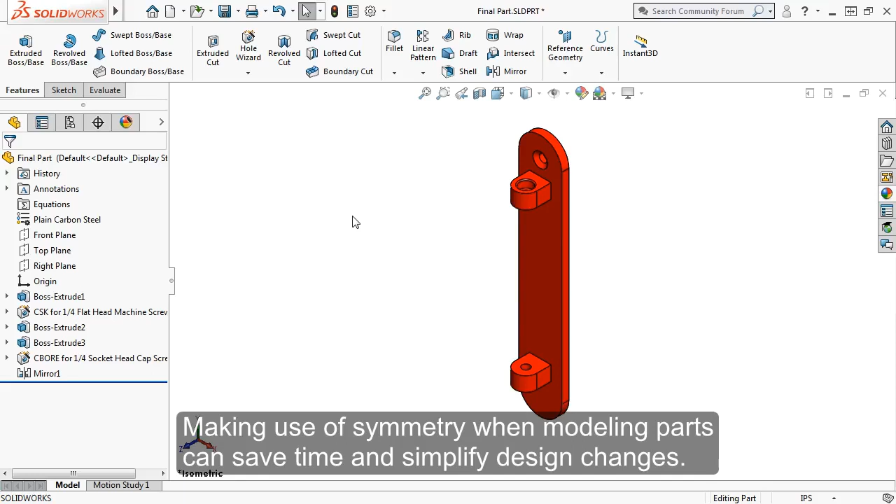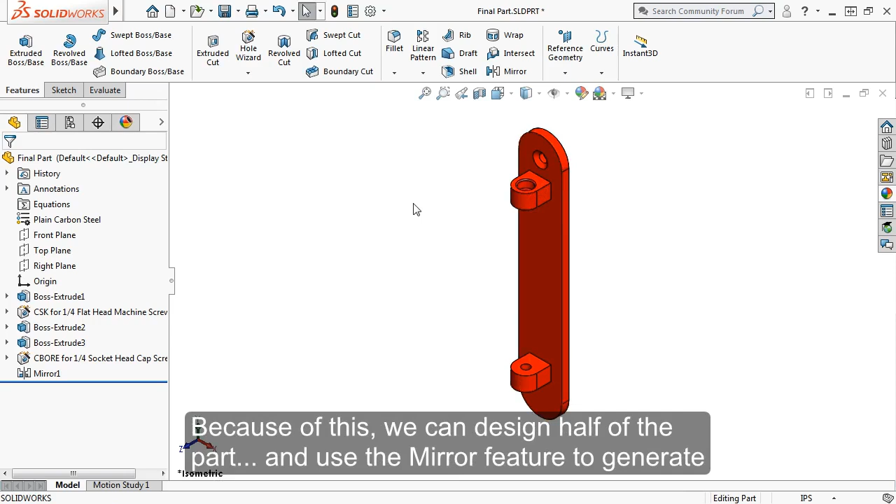Making use of symmetry when modeling parts can save time and simplify design changes. This part, for example, has symmetry across the top plane, meaning it is exactly the same on the upper half as it is on the lower half. You can see that it has the exact same features: the rounded base, extruded boss, and two holes on either side. Because of this, we can design half of the part and use the mirror feature to generate the other side.

First, I'll create a new part file. Make sure the units are set to inch, pound, second, and set the material to plain carbon steel. I'll start by creating the sketch of the first base extrude on the front plane.

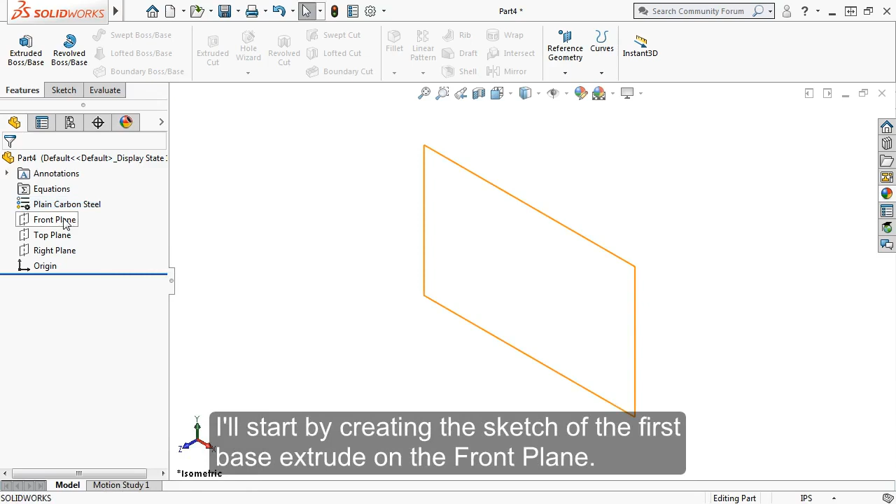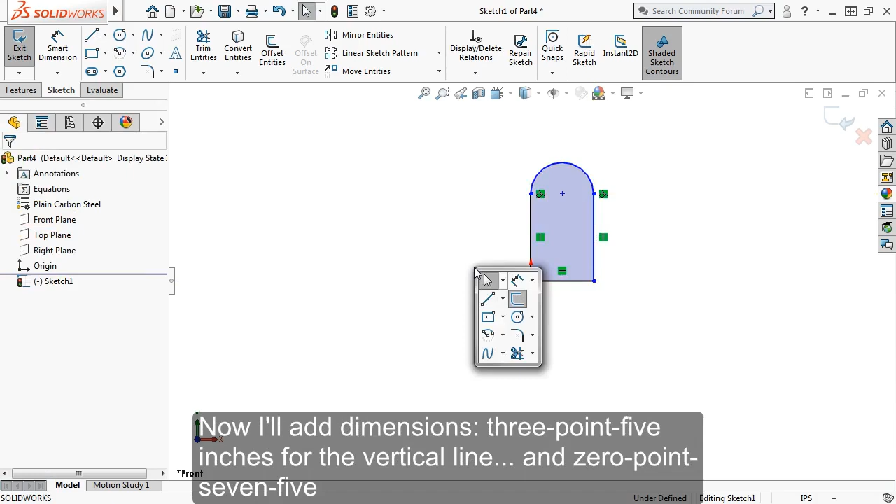I'll sketch a vertical line coincident to the origin and use auto transition to create the arc. I'll also make sure that as I sketch, the vertical, horizontal, and tangent relations are automatically created. Now I'll add dimensions: 3.5 inches for the vertical line and 0.75 inches for the radius of the arc.

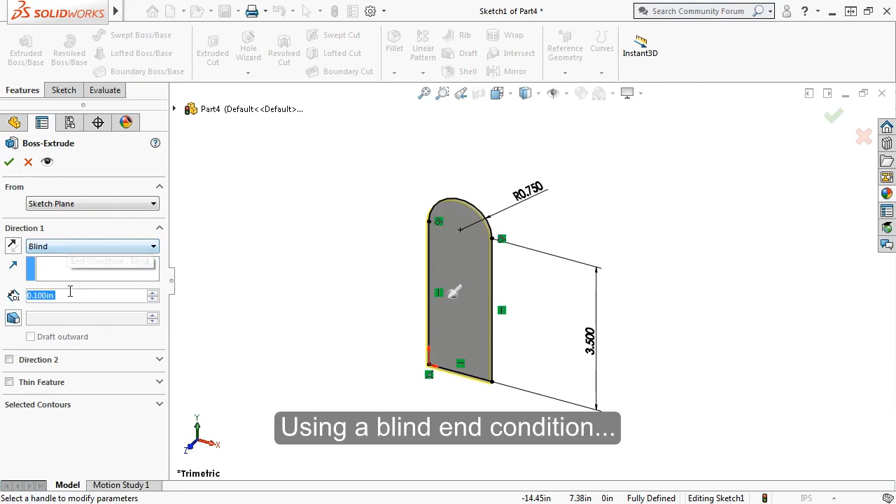Now that the sketch is fully defined, I'll launch the Extruded Boss feature from the Features tab. Using a blind end condition, I'll extrude the sketch a quarter inch. I'll click OK, and the base is created.

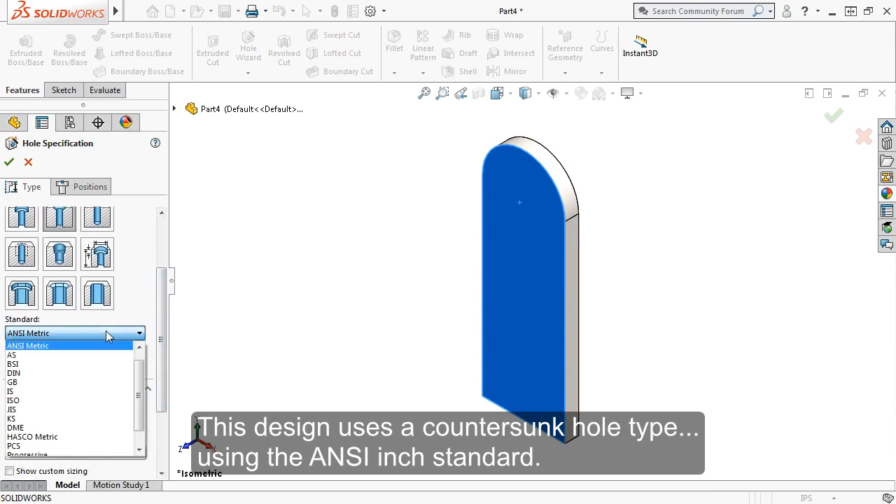Next, I'll create a hole wizard hole on top of this rounded face. I'll select the face and launch the hole wizard feature. This design uses a countersunk hole type, using the ANSI inch standard. The type will be a 100-degree flathead screw with a quarter inch diameter, and I'll use a through-all end condition so it goes through the entire part.

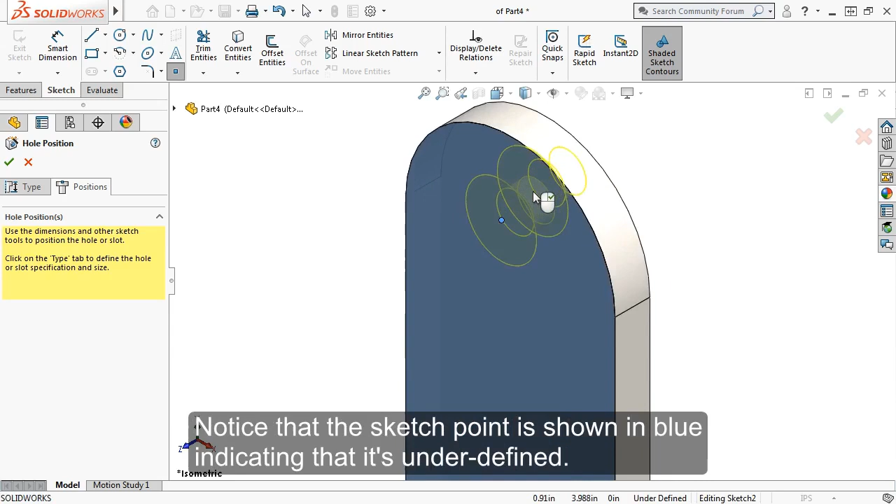I'll switch to the Positions tab and click the face to place the sketch point for the hole position. Notice that the sketch point is shown in blue, indicating that it's underdefined. To fully define the sketch point, I'll add a concentric relation between the point and the arc of the base. I'll click OK, and the hole is added.

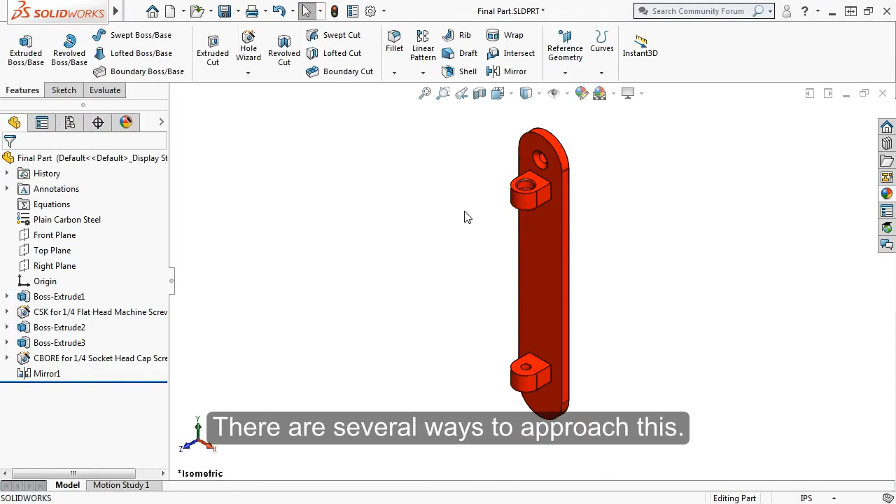Next, I want to focus on the tombstone-shaped boss. There are several ways to approach this. The simplest method, in this case, is to start with a block, extruded up from the front face of the base. I'll start a sketch on the front face of the part.

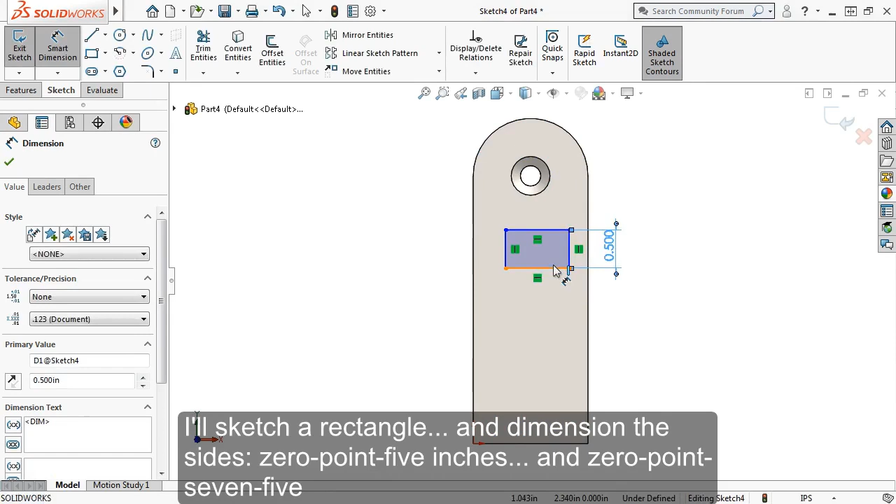I'll sketch a rectangle and dimension the sides: 0.5 inches and 0.75 inches. I'll also make the bottom edge of the rectangle 2.5 inches from the origin.

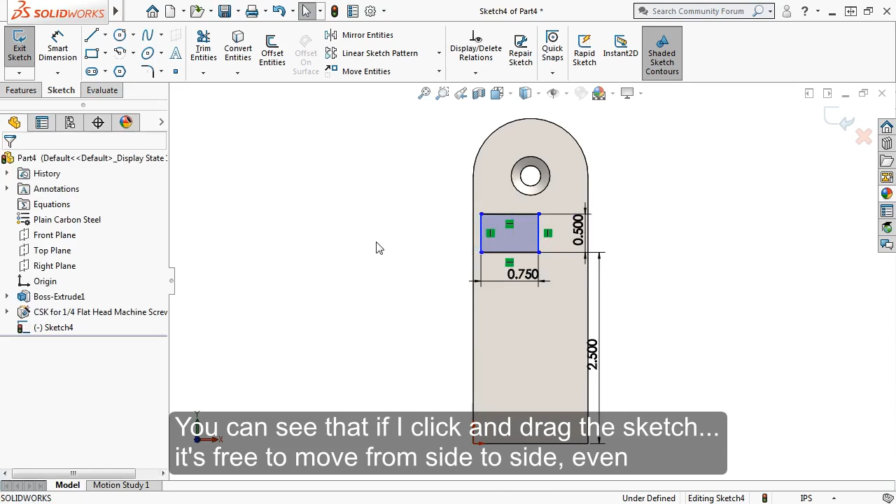All that is left to do is decide how to center the rectangle with respect to the rest of the part. You can see that if I click and drag the sketch, it's free to move from side to side, even though its dimensions are defined. To center the sketch, I'll use a piece of reference geometry, a center line, to connect the midpoint of the bottom of the part to the midpoint of the lower sketch segment.

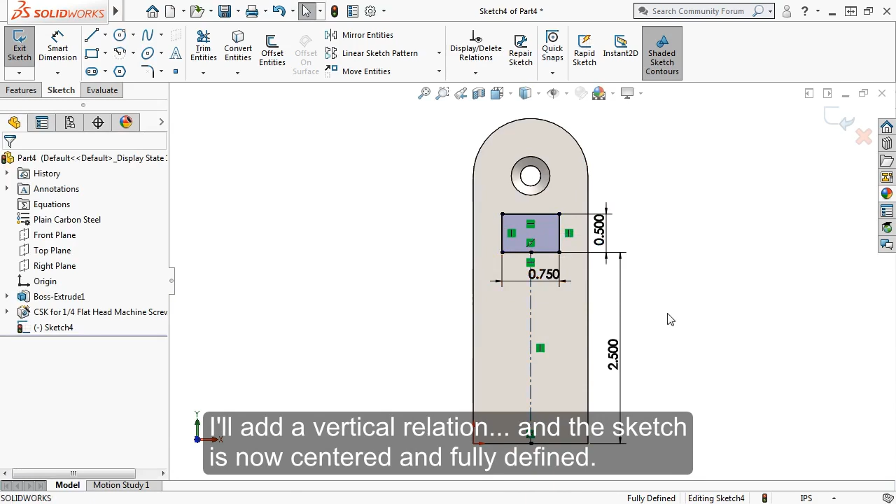I'll add a vertical relation, and the sketch is now centered and fully defined. I can now extrude the sketch half an inch and click OK.